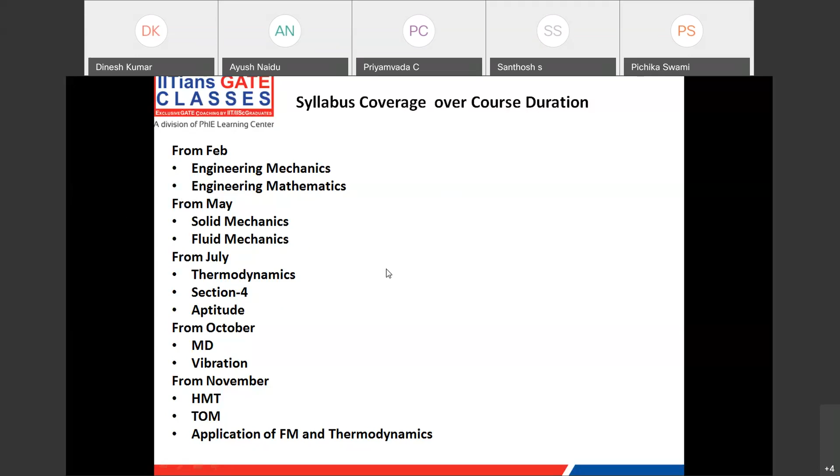We have several talks, toppers' talks, about how the preparation should be, what the right strategy should be. So we've discussed all that, and this coming year we'll have some more toppers' talks. We will invite you guys to those talks so you can directly ask questions to the concerned topper or faculty. Now these are some pictures of our doubt discussions.

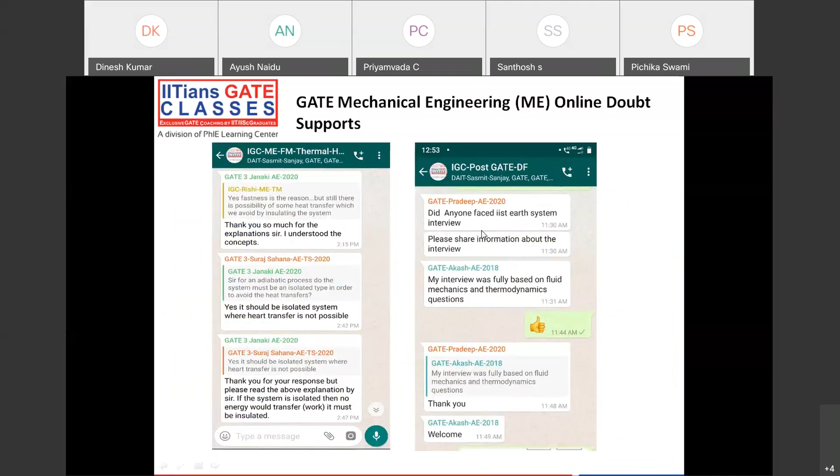You can see there are different doubt groups. Team members are also involved, students also involved, in non-class hours. You can see there are 4 sections, and for each section we have a separate group. We also provide post-GATE guidance, you guys can see.

So if you are sincere, you will get everything required for your good preparation. Not to worry at all.

We never manipulate our results. What we are, how we are—everything is shared transparently. So we have a good presence on YouTube, Facebook, Twitter, Instagram, LinkedIn.

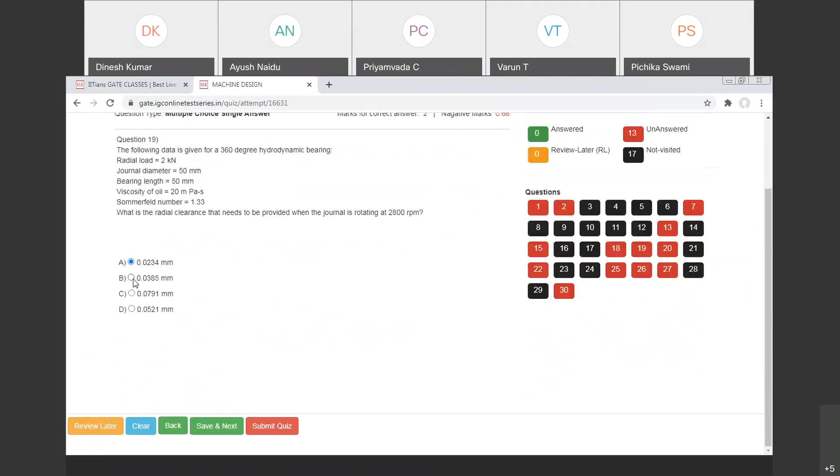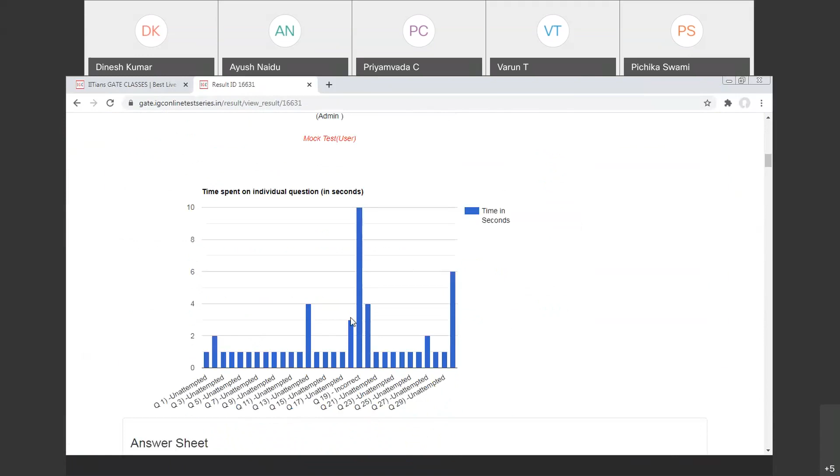So you have to attend exams on time, which will help you and also help us track your performance. Once you submit the exam, the result comes immediately. You can see all the minute details like the time you took for every question in seconds, and your rank among all the students who attended this exam.

The answer sheet will be generated so you'll get the correct options, but we do not share the direct solution, because at IGC for online exams only the answer key is provided. For the solution, you either have to explore it yourself or ask as a doubt, and we provide good doubt support. So this is about the online exam part.

Now if you come here, you can see the sample assignments. You must practice assignments on time - if you want good marks in mock exams, you must practice assignments well. Here we have assignments for every subject. Let's click HMT, so you will see a sample assignment.

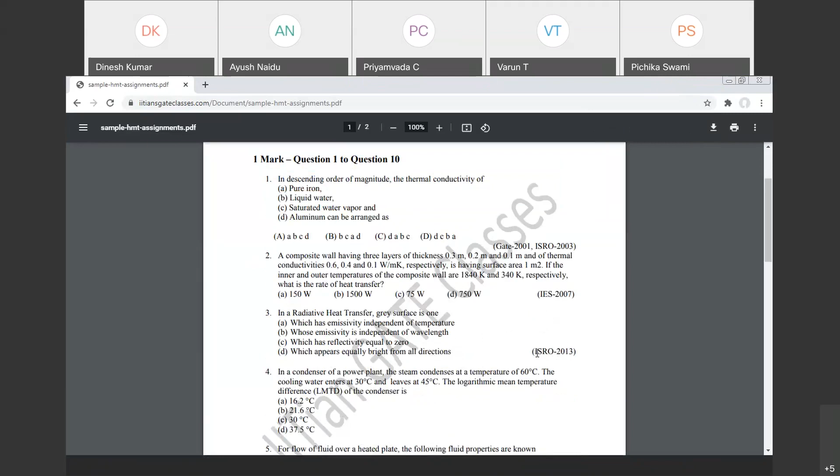Here we have taken questions from different sources like ISRO exam and IES exam, so a variety of questions for self practice. If you practice well, mock exams will be easy, and when you write enough mock exams, the GATE exam will be easier. It's all related.

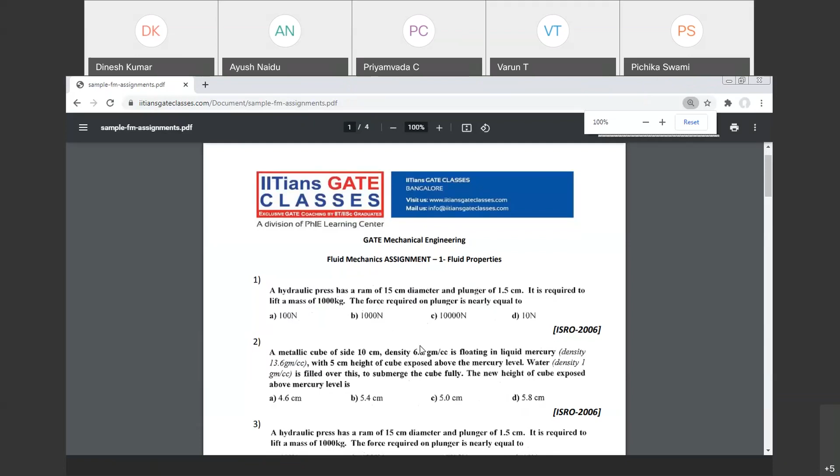Now if you take any other assignments like thermo or FM, you can see here. So indirectly we make sure students prepare well for ISRO or other PSU exams also, because we have taken questions from different sources.

If you take engineering mechanics assignments, these are the assignments.

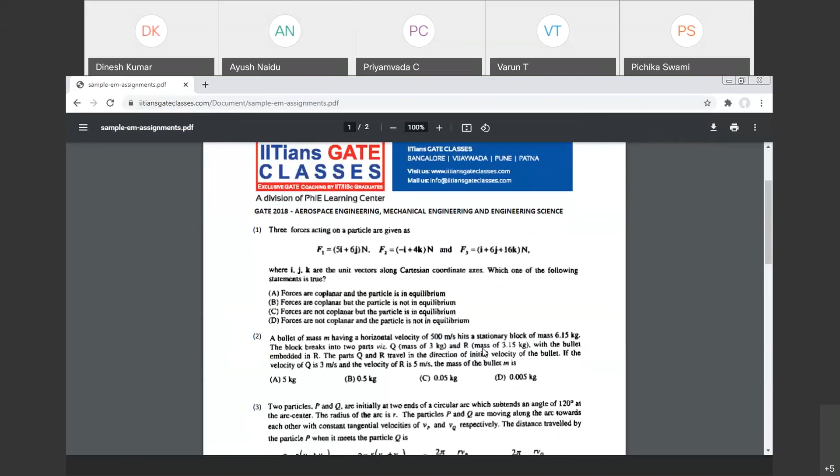Now another thing is study material. Currently some part of our study material is handwritten and some part is typed. Slowly we will provide complete typed material, but for some subjects we already have modified, properly typed material. So this is all about our sample work, and Mr. Naveen sir has joined, so I will hand over in a while.

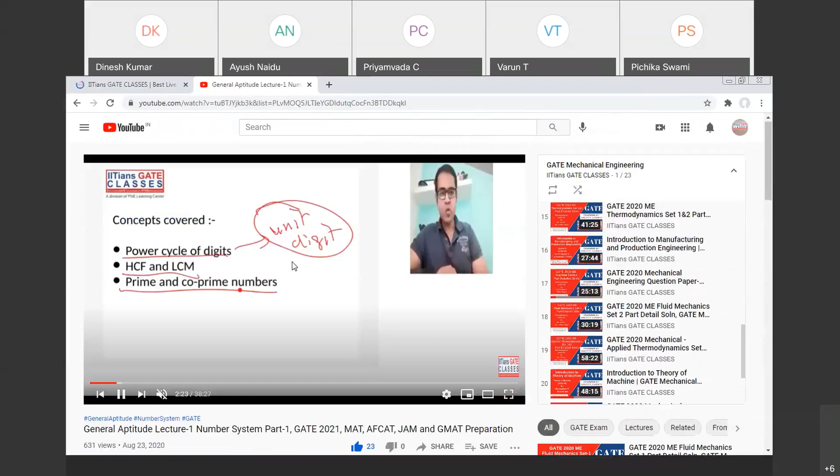Sir, while I'm trying to log into the link that you had shared for the online classes, I am updating. So Ayush, we have created one mathematics group. In that group, sir has shared the link for tomorrow's class. Have you joined the mathematics group? Yes, sir, I have joined that mathematics and aptitude group. So in that group, the link will directly direct you when class starts.

Okay sir, and then this online test portal that you had shown, we will provide credentials in a week or two, once we do some progress in the syllabus part. Or you will get credentials even before, in a week's time. Okay.

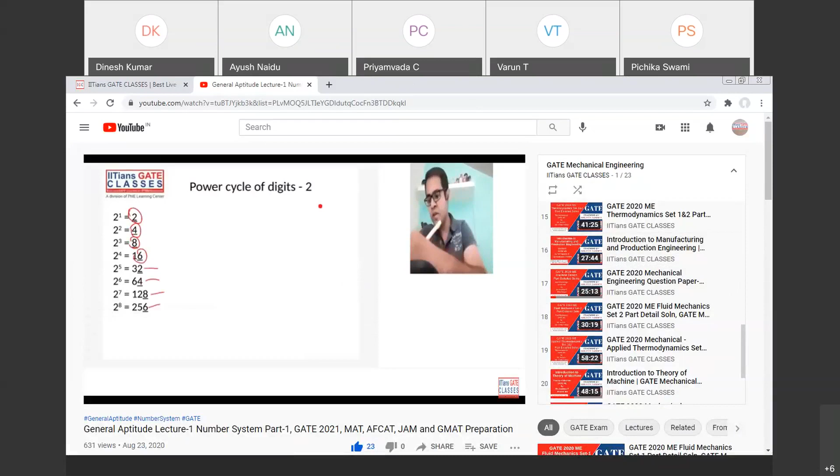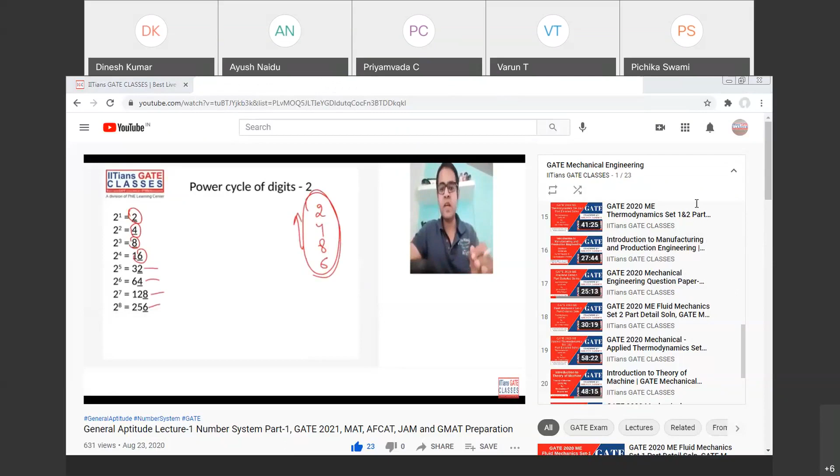Is it clear, Ayush? Yes sir, clear. Anyone else has any concern on IGC support or any other thing? So here it's a complete, comprehensive support which is required for a dedicated student. And here again, we will never try to bring so much crowd in classes. In common subjects like mathematics, you may see a good number of students, houseful, which will be limited to 50 to 60 students, but in your core subjects you'll have a reasonable number of students.

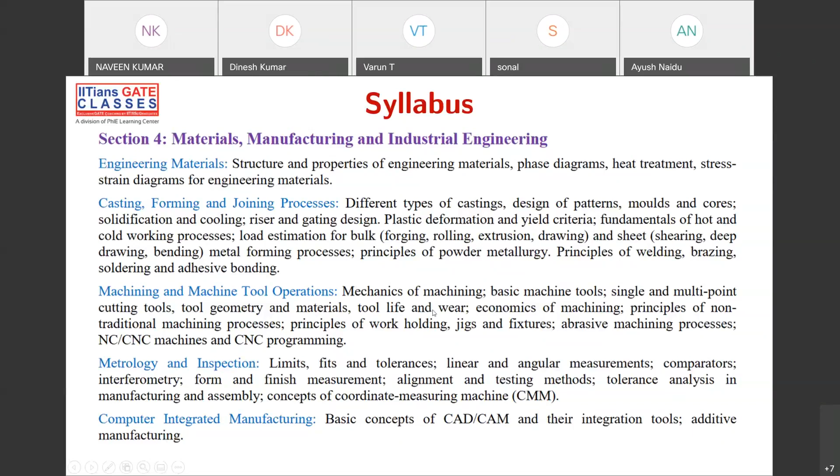So what is the weightage? People are very curious about weightage. Obviously they should know it, and you should know it too. Coming to the past, if you see the past 9 years of GATE, manufacturing is approximately 16%. On average, a total of 16 marks come out of 100. You can expect approximately 16 marks every year in GATE from manufacturing engineering, from this syllabus that I have mentioned here.

Am I audible? Is it clear? Yes sir, yes sir. Hello? Hello? Yes sir, okay, you're audible. I don't know, there's a problem here. Can you type? Can you chat? Is it okay?

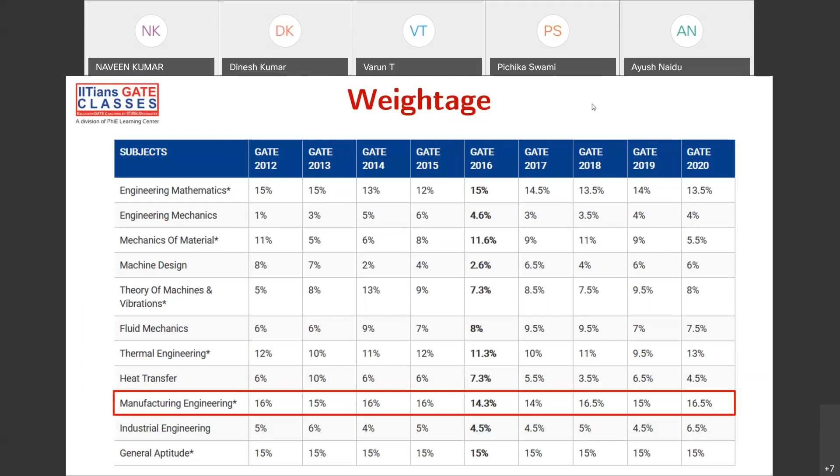Okay, fine, let me proceed. So the next question is, people generally ask me, sir, what are the books that we have to follow for manufacturing science? There are lots and lots of books in the market, but I pick some of them which are very important for GATE.

The first book I prefer is Manufacturing Science by Amitabh Ghosh and Asok Kumar Mallik. These two are professors from IIT Kanpur. Amitabh Ghosh was a professor at IIT Kharagpur, but later moved to IIT Kanpur, and both of them are retired now. They even have a book on theory of machines also.

I prefer this Manufacturing Science by Amitabh Ghosh and Mallik because if you go and see the GATE paper, and the practice questions of this book, most of the time they directly ask questions from these practice questions, or maybe manipulate the same thing in a different sense. So the base will be from this book, what I've observed.

Second, I recommend Kalpakjian. This is another important book that you have to follow for your GATE examination, and the rest of the books are just to fill the space, I've put. But these two are the important books, and the rest, while important, I feel it's not required to go through all of them, because it's not only manufacturing you're writing in GATE, it's about all subjects - thermodynamics, fluid mechanics, mathematics, aptitude, English.

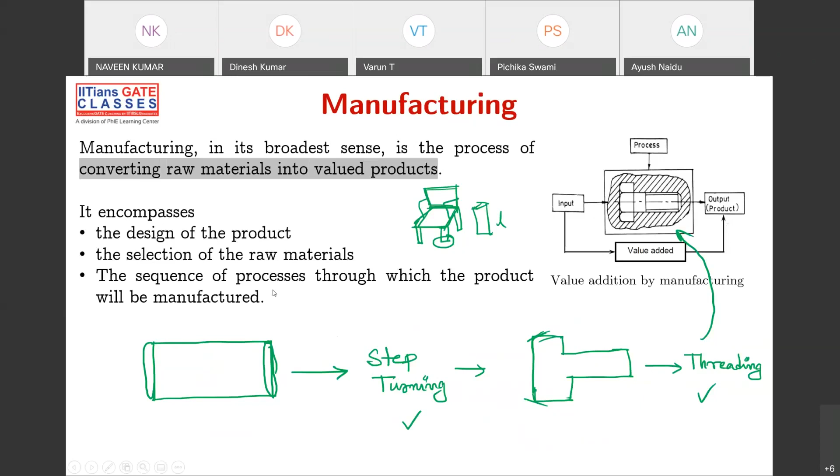So this is the same syllabus as before, but a little bit more elaborated. What are the broader categories of manufacturing process? The first one is casting, and the second one is forming. In casting, we can divide the techniques into two different things - expendable molds and permanent molds.

Expendable molds are ones you cannot reuse again, molds meaning the cavity. Permanent molds are ones where you can use the mold cavities again and again.

Reusability is good. Forming and shaping have 3 different sections: first, you can do the forming in solid state; second, in liquid or semi-liquid state; and third, you can even do it in powder form state.

In solid state, there are different processes. We have forging, rolling, extrusion, drawing, sheet metal operation, etc. And we have casting, injection molding, etc. in the liquid or semi-liquid state. So we can say casting is also a subset of forming or shaping. If you are doing your forming process using powder, then it is called powder metallurgical operations or powder metallurgical process.

What is the next important one? This is very, very important: the third one is machining. This is the most used manufacturing process in industries. So what do we have in machining? We have turning operation, milling operation, boring, drilling, planing, shaping, broaching, grinding. Different operations are available, and you have to use the process whichever is required and when.

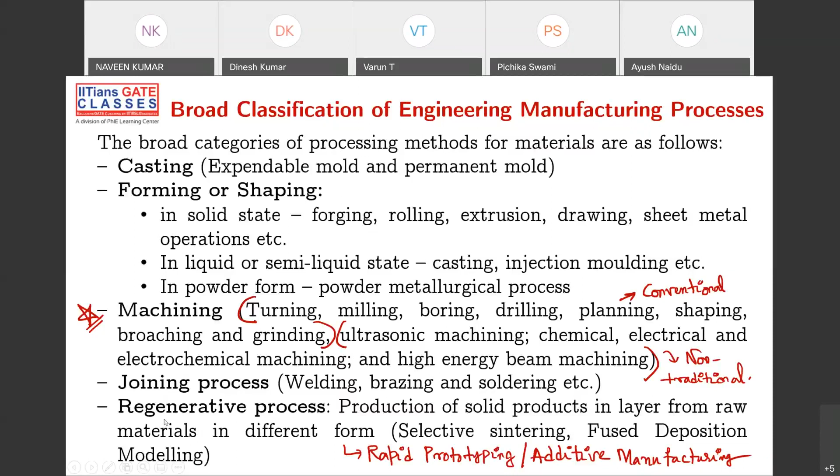Or it's sometimes also known as additive manufacturing. So we are going to discuss all these things in our lectures, right? This is very important for GATE.

Let's go on. As I told you, I have some 3-4 slides on each process. Let me do this a little faster so we can have a one-to-one session. The process of pouring metal into a hollow cavity and allowing it to cool and solidify into a desired shape is known as casting.

Also, metal casting is the primary manufacturing process for any manufacturing unit. Metal casting will be the primary processing unit. So you have to get a billet or some kind of item from the metal casting unit, then only do you go on to use another manufacturing process, a secondary manufacturing process like metal cutting, welding and so on, on the casting itself, right?

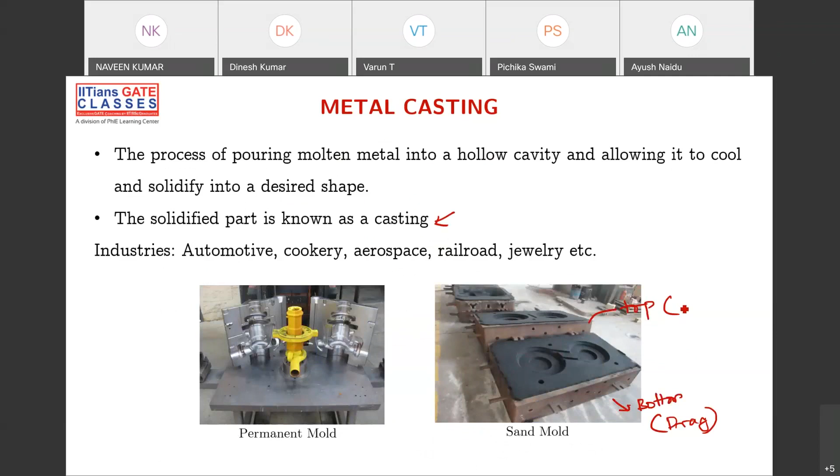So in the same way, you can see here, there is a drag box in the bottom, cope box in the top, and wherever you can see this line at which two boxes are split, that is called the parting line.

This part here is the main part, that is your product. You have created the cavity of the product, and you have to pour liquid metal into it, but you will not pour directly into the product because it is made of sand.

So you have some setup: a pouring basin, a runner, and a riser. These are called gating elements. They will make sure that your liquid metal enters the cavity at an optimal speed without eroding the sand particles, and they will also compensate for shrinkage.

These are the different elements that are there, and we are going to design and understand their dimensions and where you have to place them. So this is your simple skeleton, like this.

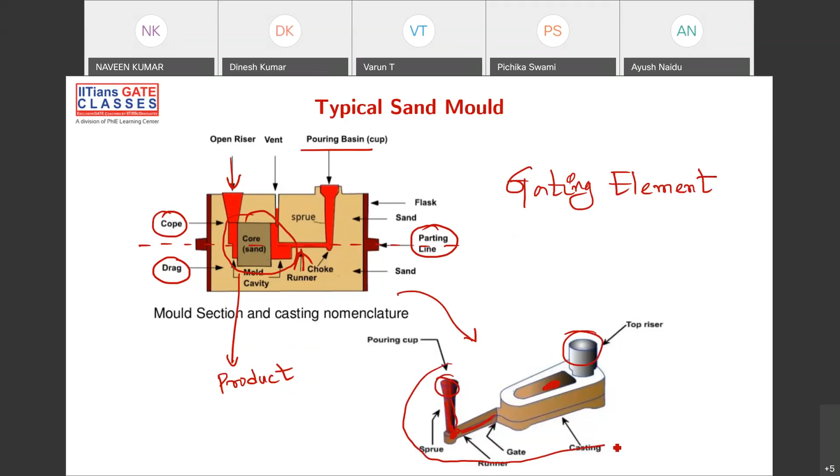This is your pouring cup, you pour that, then it enters the sprue, this is your sprue, and then this is your runner, and this is your product, this is your hollow cavity here, and this is your riser here. So this is the skeleton of your metal casting. That is a basic understanding of casting.

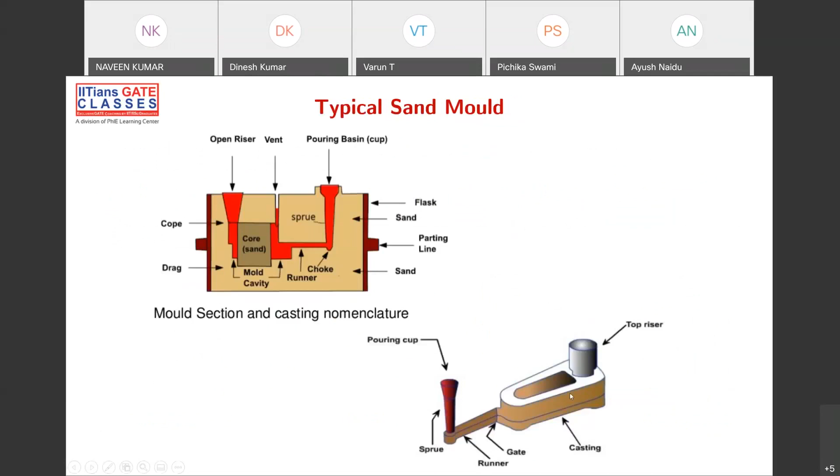So the next important manufacturing process is metal cutting. What is metal cutting? As I told you, metal removal or machining processes are mainly secondary manufacturing. Secondary in the sense that once you get a casting and want to make modifications, you use metal cutting or machining operations.

Machining is a broader term to describe removal of material from a workpiece. It's a simple subtractive manufacturing process. You remove material from an object, and you get the size and shape of your object by using this subtractive manufacturing process.

Traditionally, you have seen this simple lathe cutter, and then you have a drill bit, a milling cutter, and a grinding tool. These are the cutting tools that we force onto the workpiece, and the cutting forces are able to remove material from the workpiece.

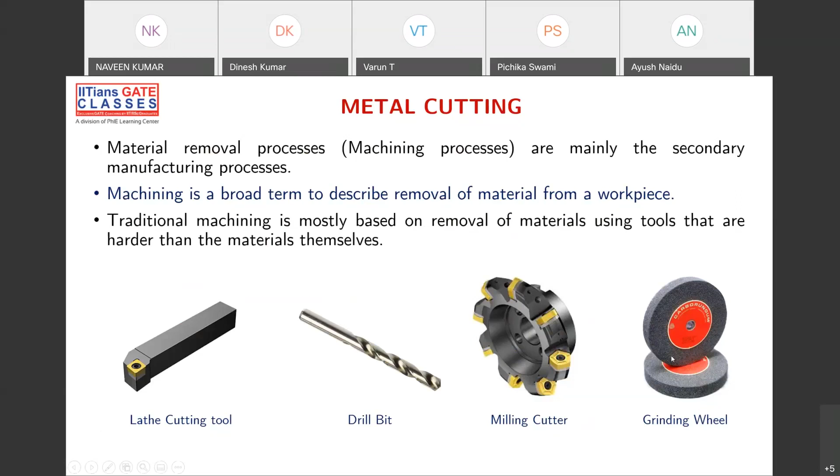So these are different tools used for metal cutting operations. What are the different operations? You have turning operation, face milling operation, slab milling - these two are milling operations, and this is your drilling operation, and this is your grinding operation. All these operations come under one category called conventional machining process.

Just see the figures carefully here. I'll be asking a question after this, like what is the difference between conventional and unconventional machining. This is your tool, this is your workpiece - for each figure. And the grinding wheel is your tool, and the one below is your workpiece. Carefully observe these figures, all these things come under conventional machining process.

And if we proceed, these are non-traditional manufacturing processes. Like you can see, this is your workpiece, and there's a big setup here, that is your abrasive jet. There are some abrasive particles and compressed air mixed here, passed onto this nozzle, and the abrasive particles are forced or pressurized onto the workpiece with higher pressures. This abrasive particles will remove the material on the workpiece.

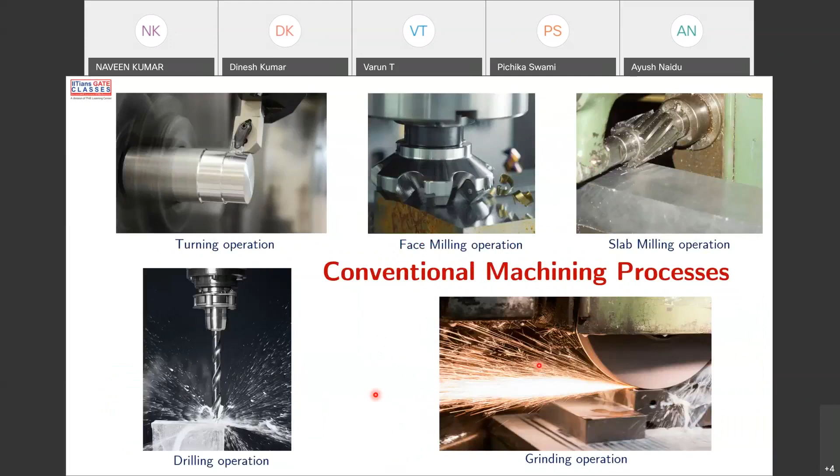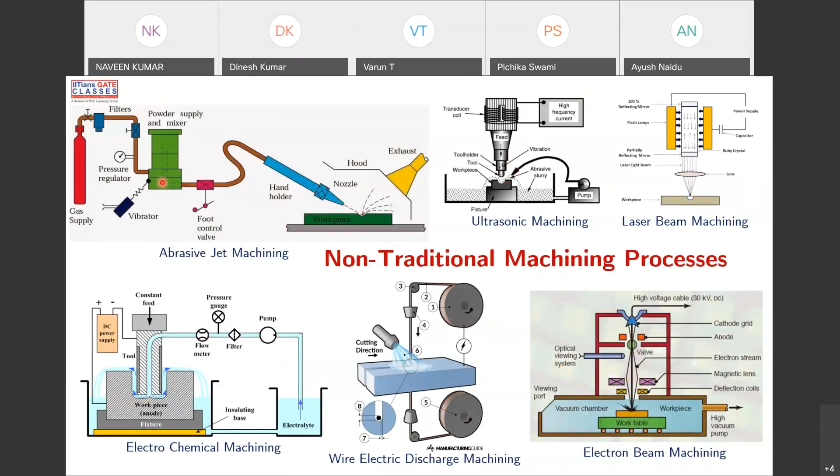Also, here you can see only mechanical energy or mechanical forces are used to remove the workpiece material, while here different energy methods are used. So these are the different energies: here it is mechanical, here it is thermal energy, here it is electricity plus chemical, here it is electricity plus thermal, and here again electricity plus thermal. So different energy sources are used to remove the material.

Next is welding. This is a simple basic classification of welding. So what is the definition? Welding is a process in which a localized permanent joint can be produced with or without application of heat, with or without application of pressure, and with or without application of filler material.

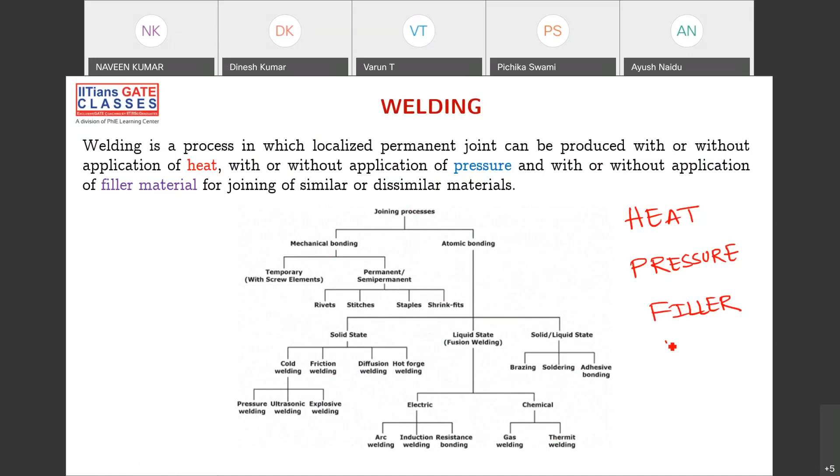So what do you see here? There are three important terms: with or without something, with or without something. Heat is the first one, very important for us, then pressure, and the last one is filler material. So these are the very important parameters: heat, pressure, and filler material. You can weld with or without heat, with or without pressure, and without filler materials. An important point is that you can join similar and dissimilar materials—that is important to note.

These are different classifications. Joining is classified into mechanical bonding and atomic bonding, and mechanical bonding has temporary and permanent types.

If you see here, these are things you are going to discuss in machine design. In manufacturing, we discuss pressure welding, ultrasonic, explosive, arc, resistance, gas welding, thermite welding, brazing, soldering, adhesive—all these will be discussed in the welding process, because welding is done atom by atom, at an atomic scale, making the joint very strong.

Temporary joining is nothing but your screws—you want to join them, you can remove them whenever you want. Semi-permanent is nothing but rivets, stitches, staples, shrink fits. All these are simple semi-permanent joints, or sometimes they may be permanent also.

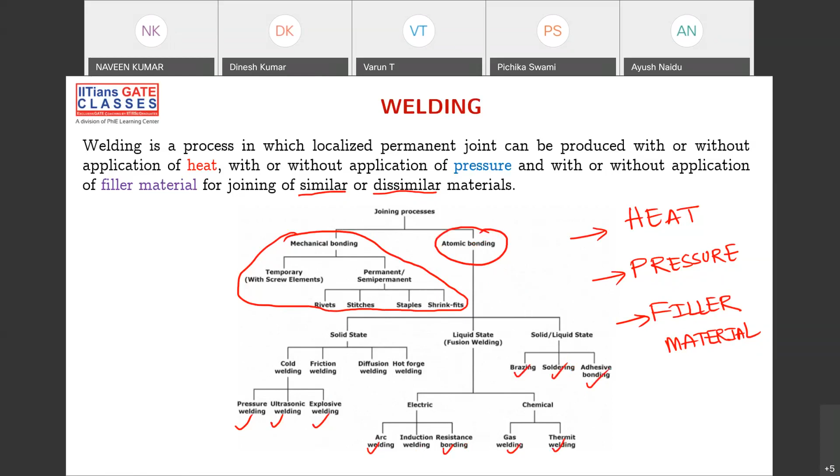One is oxygen, another is acetylene, and you allow them through a nozzle using some kind of torch. You ignite it, and flame is provided onto the workpiece. Because of the flame, the workpiece is melted, and you have an extra filler material that you're trying to provide, and then the welding is done.

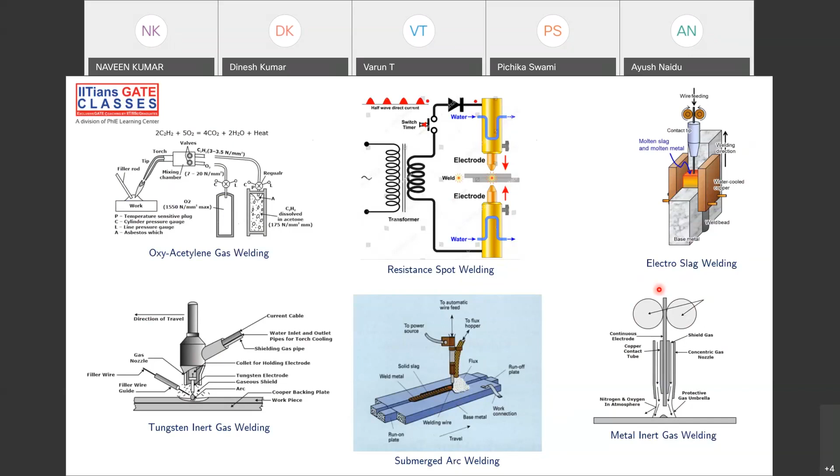And next is nothing but forming. Just a basic definition here: metal forming is a process, known as metal working process. Under the action of mechanical forces, the shape and size of a metal piece undergo a change, and by this mechanical working process, the shape and size of the material can be achieved with great economy. The important thing you have to know is that you're applying mechanical forces onto the workpiece to get the required shape and size at the end, and it is not a material removal process. Here your material is conserved—whatever material you're starting with will be equal to the leftover material. You're just shaping it, using your energy to change the shape and size of your material. That is the important point to note about forming.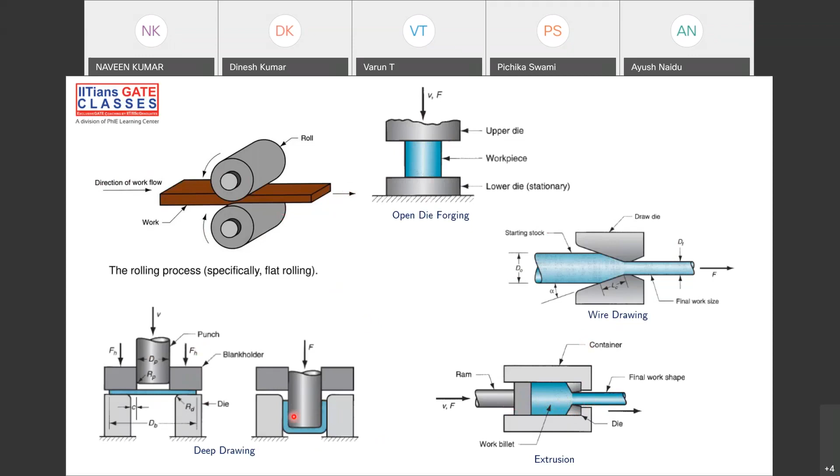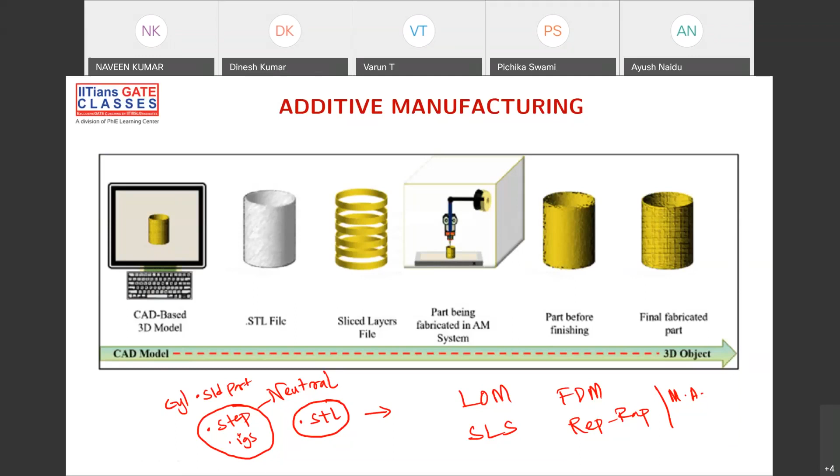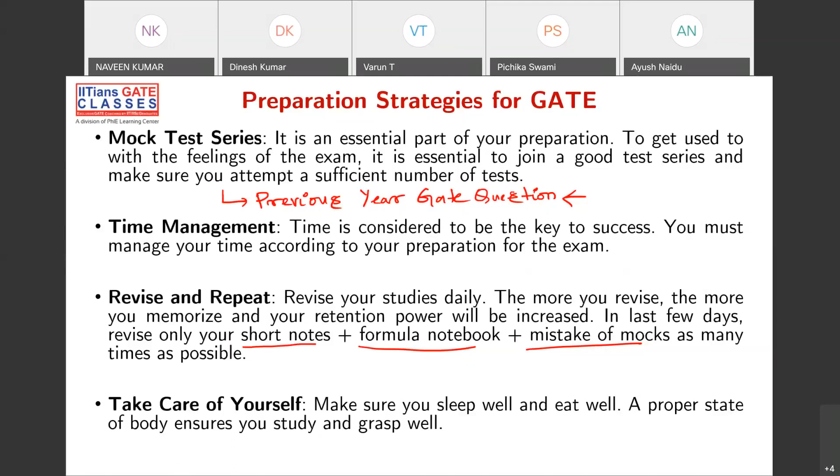People think, okay, I'll eat whatever I want, whenever I want. That doesn't work here, because you have to sleep well and eat well, and that ensures your body gets more energy so you can grasp well. Instead of studying for 3 hours, you can study for 6 hours. So that is the importance of yourself, you have to take care. Mainly sleep and food are very important.

Next, people start with, where should I start, sir? I don't know how to start. Okay, start with your favorite subject. Let's say if your favorite subject is strength of materials, start from that, or if it's thermodynamics, start from that. Don't say that in coaching they are starting with some subject you're not interested in. It's not required that your coaching institute start the same subject. If you're interested, you can start reading some textbooks. That will boost your confidence.

For the first 3 or 4 months, go subject wise, and while you're reading, don't mix more than 2 subjects. Let's say you're reading strength of materials, then parallelly read thermodynamics or heat transfer or manufacturing. Don't read 5 subjects in 1 week, that is not going to lead anywhere. Also, you have to know the different patterns and mark divisions I've told you already, and of course refer some standard textbooks apart from your coaching institute slides.

Very important is that please solve as many questions as possible. Some of the questions will be given by the coaching institute, some you can solve from previous year questions, some from mock tests, and some from your textbooks also. So solve as many problems as you can. Make mistakes, learn from them. That is what I'm saying, you make mistakes, but learn from it. That is the important thing.

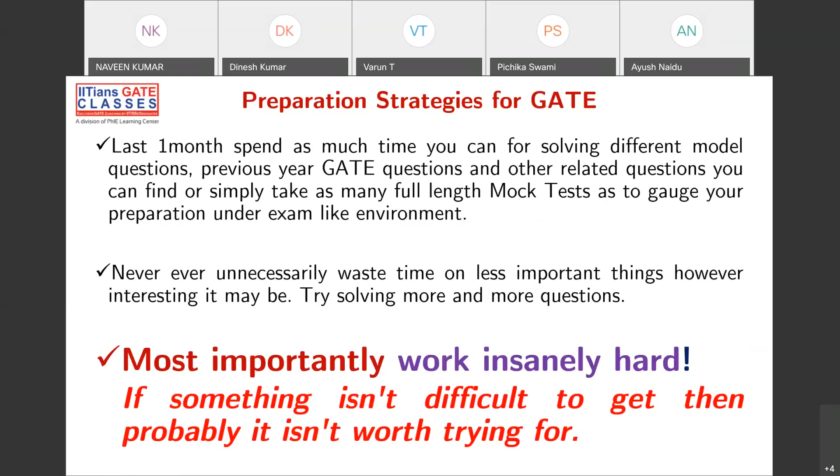Good enough. And most importantly, work hard. I only suggest people work hard, and after working hard, result will reach you in any way, not now, this year, next year, or even after 5 years, your hard work will not go anywhere. So this is my favorite quote: if something isn't difficult to get, then probably it isn't worth trying for. This is a very important and famous quote from my side, and I request you, whether you're joining this institute or not, that doesn't matter, but work hard, practice questions with the basics. That's it, that is your primary strategy for GATE.